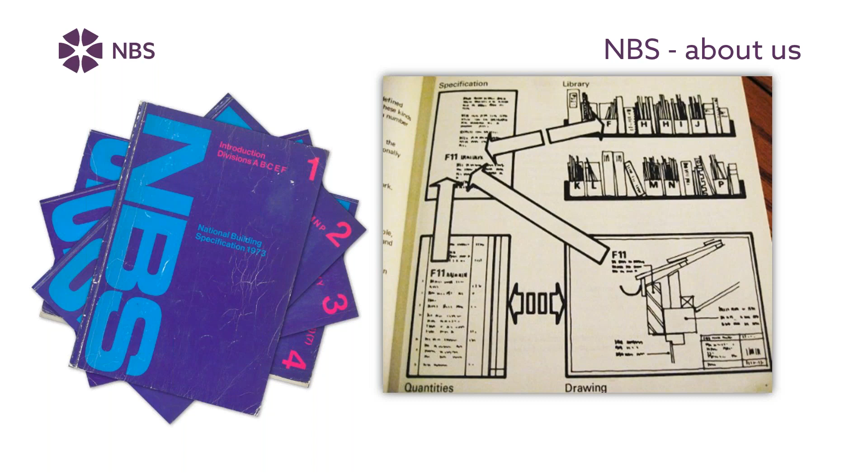But even in 1973, we had this image, which showed the specification being linked to a library of technical information in manufacturer's literature, to a bill of quantities, and to drawn information with strong annotations between the two. Now, obviously, that drawn information is much more likely to be a 3D representation and to link to CAD and geometry information. But it's still really important that those associations and connections to the specification are made, and that's what NBS tries to do.

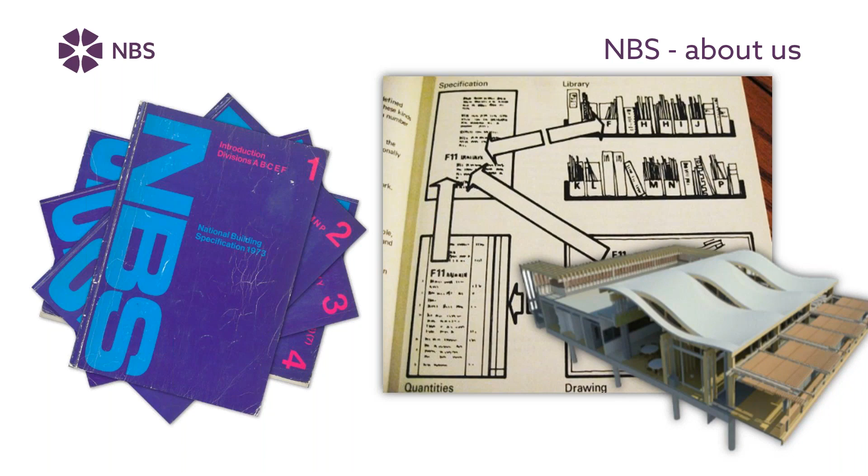We have two sets of customers. The majority of people who use our specification products are design professionals - architects, engineers, contractors and so on. We also have product manufacturers providing technical data and specifications for their products, and advisory trade bodies as well. The thing that NBS does differently is that we provide high quality data to match those two together, so that end users specifying are looking for high quality manufacturer information that's reliable, and those manufacturers need to know that the specifications they're getting are robust and full of the right performance information.

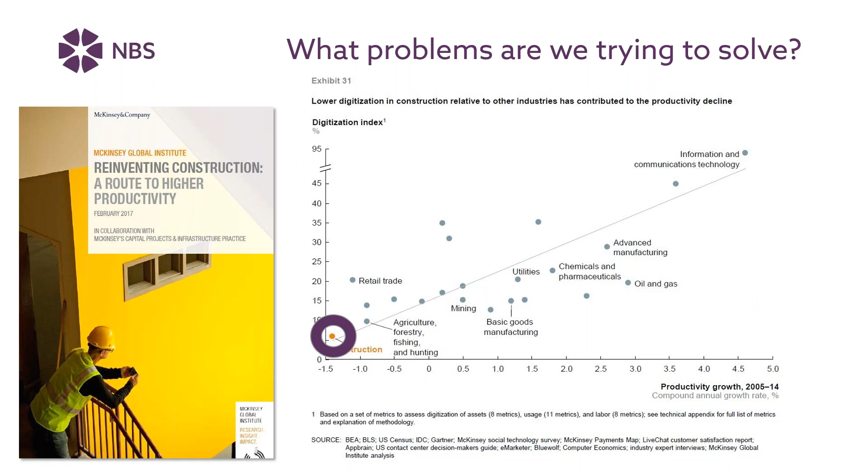So we still bolt things together the same way, there's still the same inefficiencies, the same problems that happen on site in a regular way. In terms of that McKinsey report, we can look at construction actually having really low digitization, and that has a direct impact on the productivity of the industry. So even though you might expect IT and media and other industries to digitize really quickly, we're even behind mining, agriculture and forestry in terms of the digitization of our industry. And that really sets us back in terms of what we can do to put productivity right.

NBS also produces reports. Most recently we've produced the Construction Technology Report 2019, and we produce an annual BIM report indicating the level of BIM adoption in the UK industry over the last year. We've got tons of case studies and research and reports about the technology stacks that people are using on projects, so do check those reports out. Here's an example from one of those, the NBS specification report, and this particular question is looking at specification difficulties - what are the challenges people encounter in terms of specification?

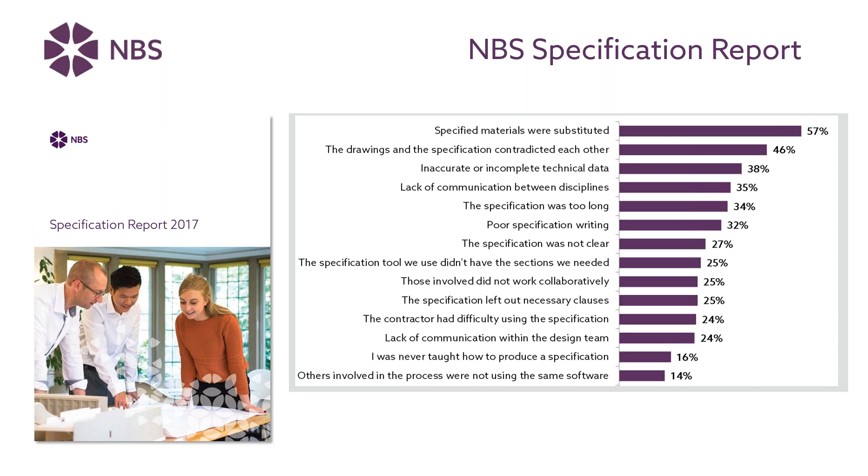The example that we see here is over 50% were saying that the specifications of materials that was made in the design process are substituted at some point in the process. Other things: lack of communication, poor specification writing, and then the last two at the bottom, not being taught how to produce a specification, and the others in the process not using compatible software.

And we see the same things come up time and again. A lack of quality in terms of specifications not being clear or concise, not being classified in a consistent way. A lack of time to spend on specification. So time tends to be spent on drawn information and on the model, and then the specification is left till a later point. And actually it requires the most experienced staff, and therefore the most expensive, to actually produce that specification information.

And also to define the responsibilities. How much data is required for a particular system and who's responsible for generating that? Is it the contractor, the manufacturer, the designer, and so on.

Not only that, but we found that over a third of the users who responded to our survey have seen a project go into dispute. And that's often when the specification is actually presented and probably read for the first time by many in the project team. So a third of the industry going into dispute in terms of projects that they're working on. When we know that disputes are increasing, often those are down to specification issues in terms of the way that project might go.

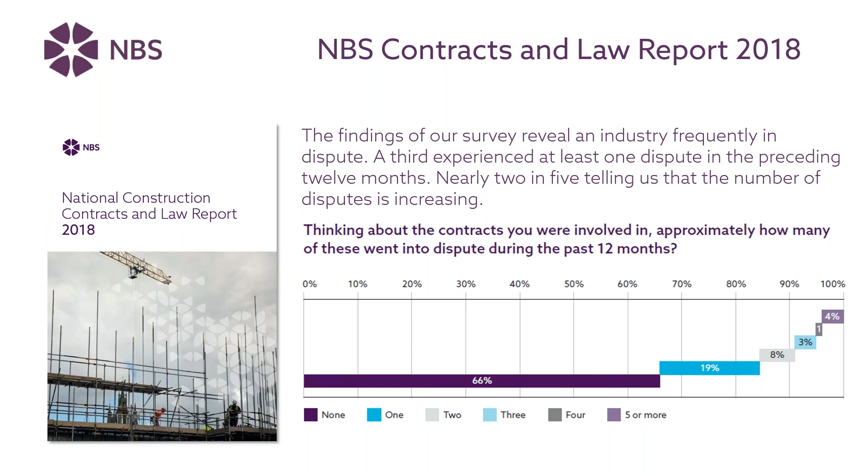In the UK, we've been fortunate in terms of digitization that there was a mandate pushed forward by government to encourage BIM implementation across our industry. This was in 2011, Francis Maude saying that if the UK industry could push the BIM agenda, we would actually become leading in that market. And that's been the case, and we've seen real productivity as a result of that.

At the time, they were just in the design and construction phases, but now this can apply to the entire BIM timeline and to the entire project timeline.

In the UK, this isn't just theoretical, the need to improve the construction industry. Many of you may have heard about the tragic fire in West London, at Grenfell, where 72 people lost their lives for a number of reasons, one of them being the use of combustible cladding along with flammable insulation. That's been a real impetus to review, especially fire strategy in the UK.

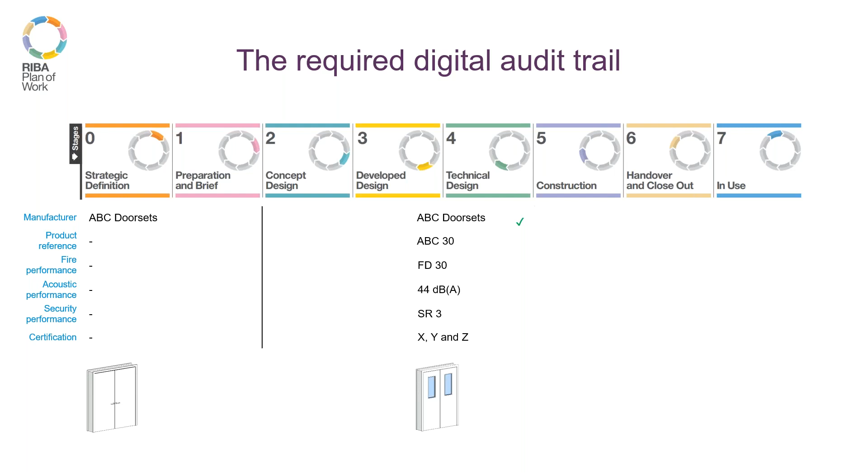In UK parlance, in stage 3 or stage 4, the technical design stages, you might have chosen the kind of product you're looking for from a particular manufacturer because it achieves a certain set of performance requirements fire performance, acoustic, security certifications, and so on.

But in the construction phase, that might be substituted by a contractor on site for a number of reasons. The important thing is checking that all of those performance requirements are still captured and met by the new product. Then at a later date, when the handover of that information happens to the asset manager, ensuring that data is captured to allow the product reference to be used in the asset management in the long term.

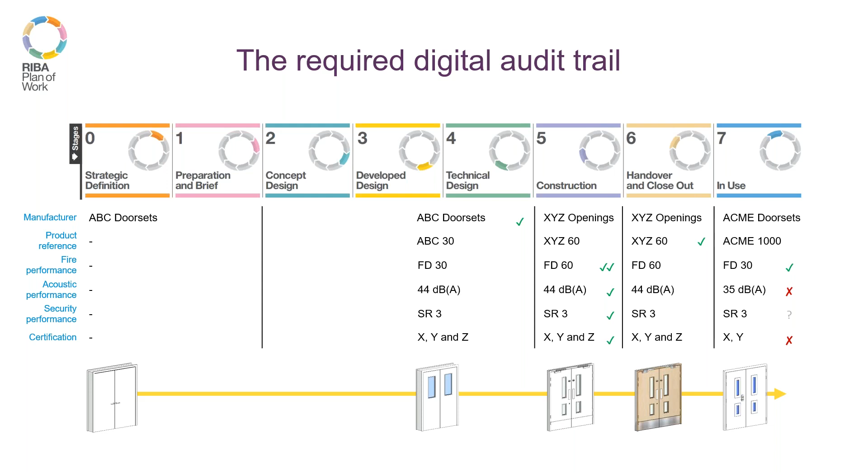So at a later date when that door needs replacing and we're into in-use phases, somebody says, oh well, we've got an Acme 1000, we can just use that. Well, no we can't, because the performance requirements are set out and are stringent in terms of what's required for that particular thing. That idea from design intent carrying right the way through to the operation of the building is being called the golden thread, ensuring that golden thread is carried through in all of the specification and product selection across the project.

So what's the plan and how do we go about digitizing construction? Well, 20 years ago, Bill Gates was quoted saying that the differentiation between those who win or lose in business - he was talking about large tech companies at the time - is how to do an outstanding job with information.

And how you gather and use that data is the difference between success and failure. In the same way, the World Economic Forum report indicates that there's a real need to understand that information management is a real value creator. It's not just about a new cost of technology. So there are three stages to this in terms of motivation - thinking of BIM and digital construction not just as a cost, but as a potential value creator for the business, and understanding the benefits.

Collaboration - if we're all using the same standards and open systems, we begin to communicate better and collaborate more effectively. And then the enablement, having the background, the clients, the contractors, and everybody working together to ensure that this isn't just about implementing technology, but about changing behaviors and processes right the way through the supply chain.

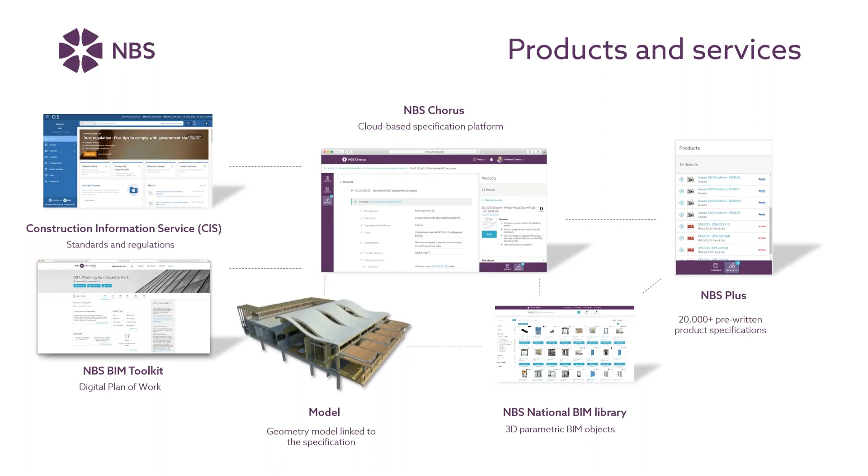So let's have a look at NBS Chorus in particular.

Here on screen you can see NBS Chorus, and there's a couple of things to say. The first is that it's entirely cloud-based, browser-based, so I'm using Chrome in this example, but you could use whichever browser you are most familiar with, even an iPad or a tablet, and NBS Chorus will respond to whichever device you're using. Also, you'll notice that you have a visual representation of the projects that you're working on screen, and they could be in any locations using the different content that we've got available.

But because they're project-based, you can invite people to just have access to the specifications that you want. So within one of those projects, I could have multiple specifications associated with it, and invite somebody to just the relevant part of the project. And they wouldn't have visibility of the other aspects of projects that I was working on that I hadn't invited somebody to have access to.

And here's a typical article within one of the sections of NBS Chorus, in the heavy timber framing section. You can see that it's a digital way of working. I can check out a particular article and begin working through it, and there are suggested values in lists that drop down to help me make choices. On the right-hand side, there's always technical guidance to assist with the choices you're making as you go through.

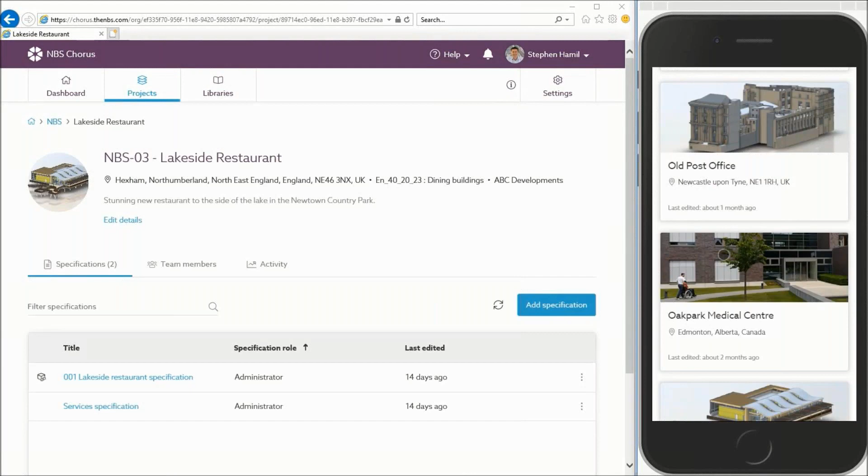But in those circumstances, here's an example of two people working together. On the left-hand side, somebody working in a browser view, and on the right-hand side, somebody working on a mobile device, a tablet, or whatever it might be, using the UK content in this example. As I work through on the left-hand side, I can check out a clause, and then on the right-hand side, that user would see it as locked out, and they wouldn't be able to work on that.

But by editing their own content, that's then locked out to the person working in the browser view, so you have visibility of the changes being made in real time, because they're being pushed to the cloud and saved. In terms of having access to those, you can collaborate with people and have multiple people working in the same section at the same time.

This is about building a connected, collaborative ecosystem that's much wider than just the specification itself.

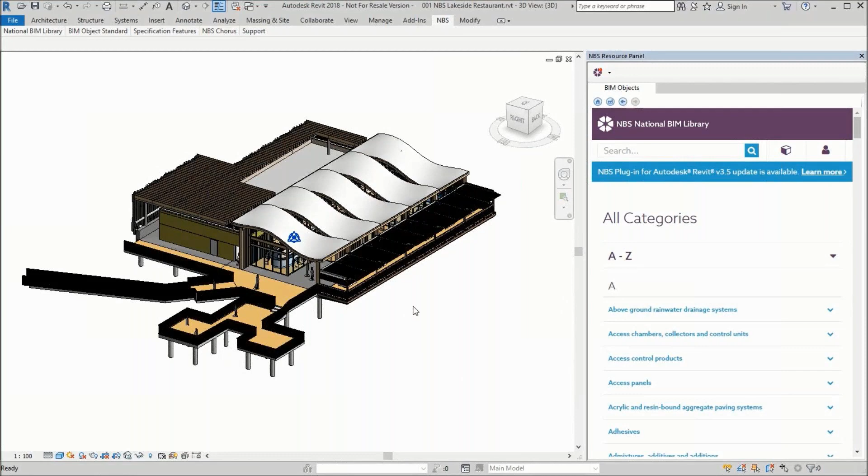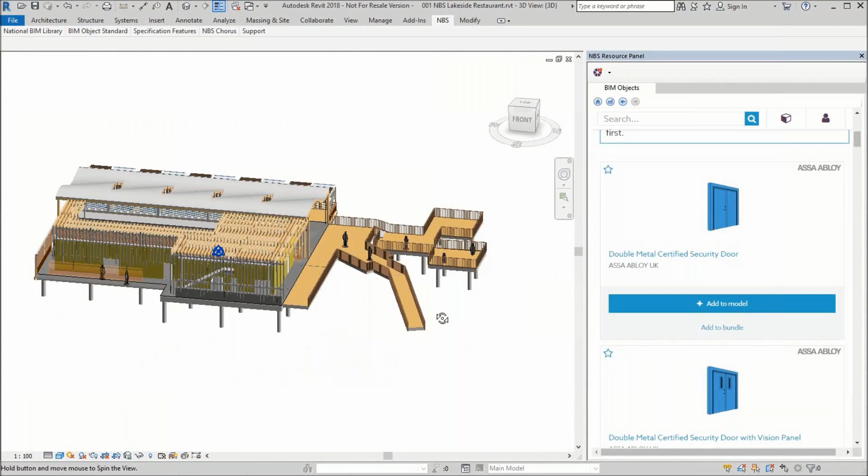We can start that journey by looking at the National BIM Library, our BIM content. In this case we're looking for a particular security door, and we can search for that on the National BIM Library and drag it directly into the Revit interface. When you drag that into the model, that object comes not only with its 3D representation, but with all of the parameters and properties. So when I select that in the Revit view, you can see on the right-hand side all of the various properties and parameters that you would expect, produced in a standard way, in accordance with recommended standards.

We're also integrating more closely with common data environments, things like BIM 360, Newforma, and Viewpoint, integrating NBS with those common data environments.

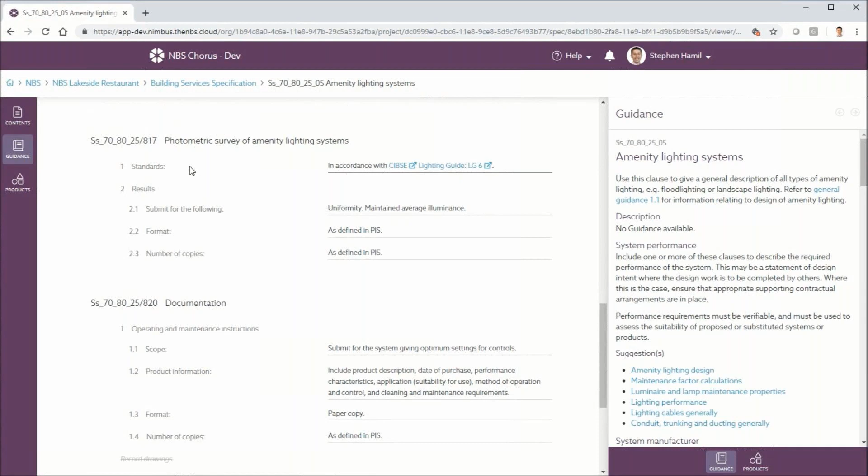In this example, we've got some clauses which will contain information like testing or inspection that might contain the term submit proposals or submittals required. What NBS Chorus can now do is find all of the instances of those terms like submit and export them as a submittals schedule, to import it into common data environments like Newforma and BIM 360. That's in a format understood by those CDEs, and in each of these particular CDEs on screen you can see a submittals report being generated, but still using those NBS Uniclass 2015 codes to organize that content, rather than the manual task of someone going through the spec to find everywhere it says submit or submit proposals.

What's really exciting to me is our integration with our CAD and modeling platforms as well. We're working with multiple partners, Autodesk, Graphisoft, Vectorworks, and so on, to ensure that we can integrate NBS Chorus really closely with that design software.

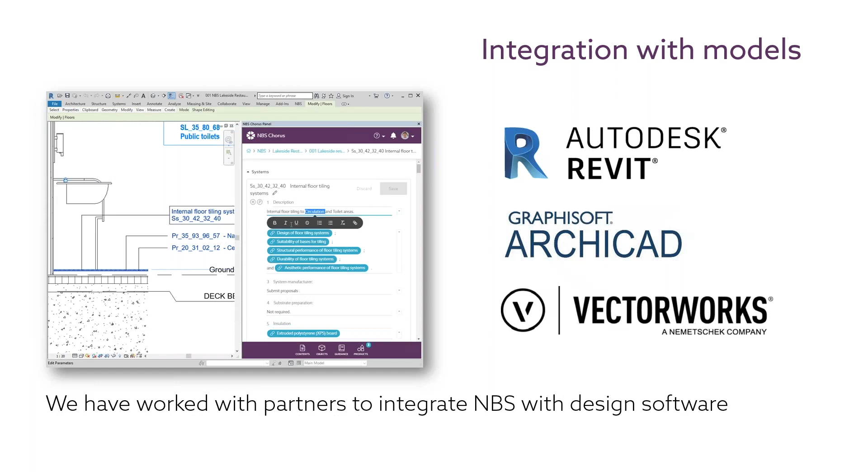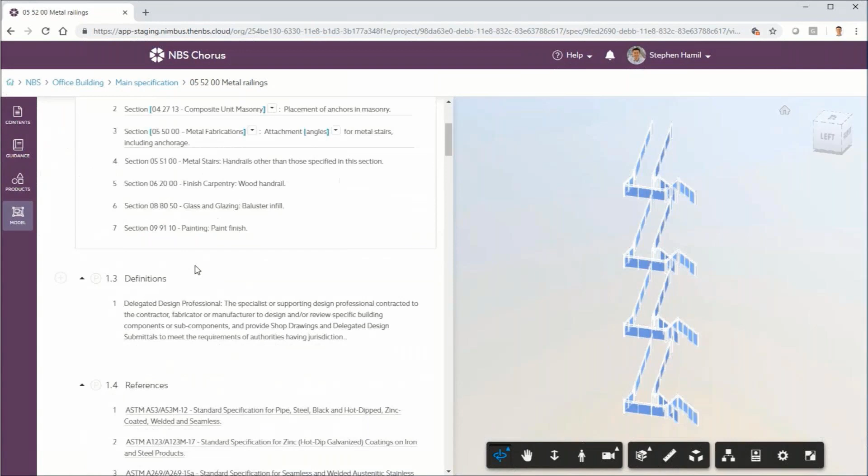The first aspect of that, here's an example of a Canadian project, courtesy of Next Architecture, a 120,000 square foot office. I should admit this is currently in concept - an example of what we're hoping to develop using the Autodesk Forge platform, showing the ability to navigate the specification information using an example of the model.

At the point in time the model is uploaded, you can begin to navigate through the specification by clicking on various areas of the model and see the clause content on the left-hand side and the sections and articles, but also begin to work through them live with the context of the model on the right-hand side. That's currently in development using the Autodesk Forge platform.

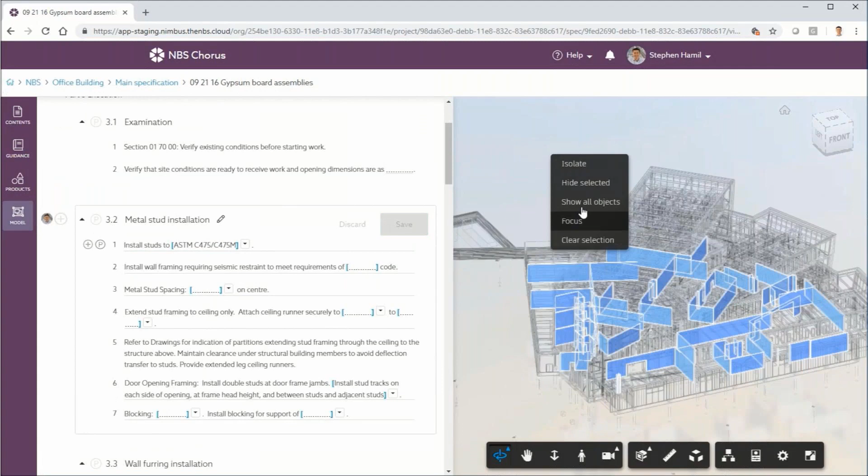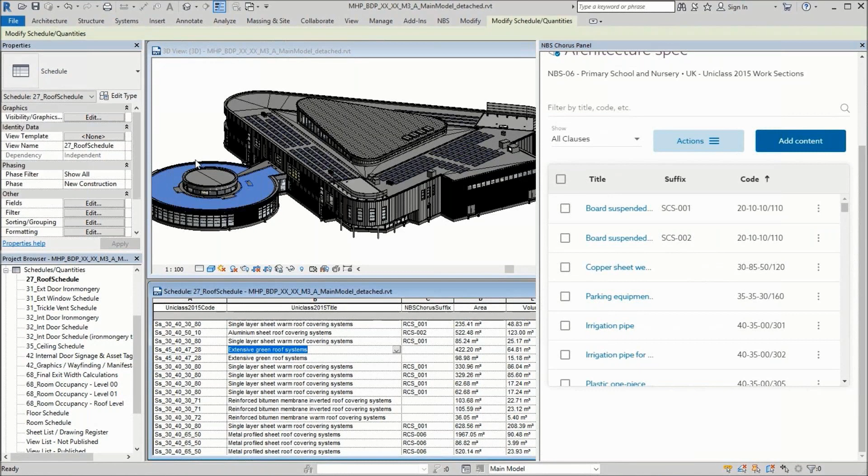What is live currently is the ability to integrate directly with the Revit interface - our most advanced integration is currently in Autodesk Revit. As a benefit of what Revit can do now, we can run NBS Chorus live in a browser panel within Revit. You can see the model at the top, a schedule at the base, and Chorus running exactly as it would in a browser on the right-hand side.

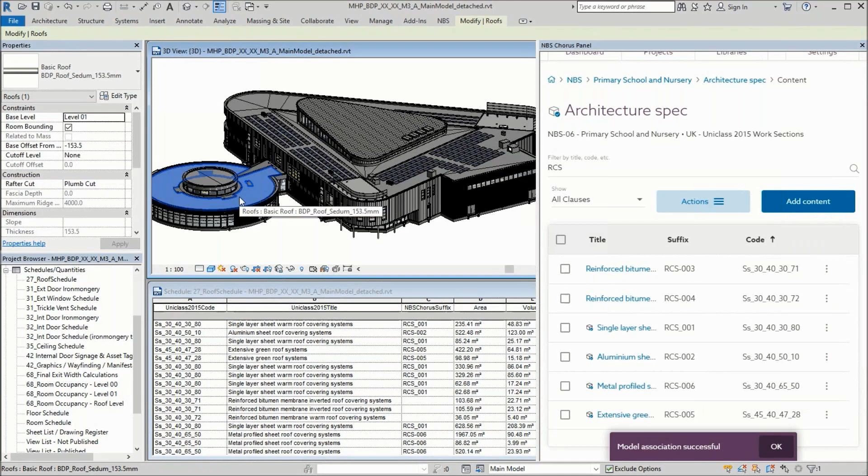What we can do is begin associating the model information with the spec, so that as we develop and move through the specification, we can take all of, in this example, the roof covering systems, and begin associating each one with model information and spec information to make sure that association is really close. That means annotations on any sections or plans of this drawing will always have the right reference, kept in sync by NBS Chorus and our plugin in how we manage errors and warnings.

But it also means that for those users who are more familiar with Revit and with a modeling interface, they can have access to the specification and understand the impact of the decisions that they're making. If they have the relevant permissions, they can even edit the specification. So as we begin to see more and more users working in a modeling type way in a digital platform like Revit, being able to have access to the specification and keep those associations, you can see now on the right-hand side and in the schedule that they're now all coordinated between model and spec.

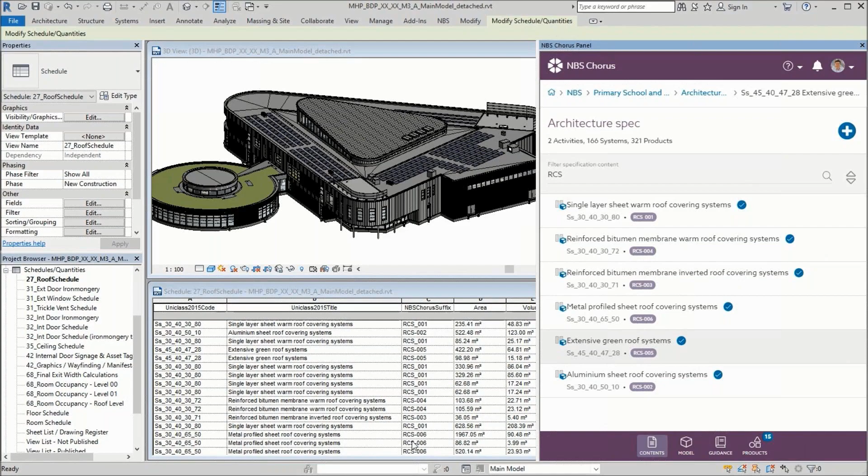Finally, as if you didn't need more reasons to trust what NBS do, we've had some recognition of late that's been really valuable to us. We've won some awards in terms of the UK construction industry, and there's an article indicating whether NBS is becoming the Google of BIM in terms of the types of developments that we do.

But also that World Economic Forum report that I showed you demonstrated that NBS was a good example of, in this case, the BIM library that I showed you of a data marketplace. The key thing there being that we only provide information that recognizes international standards, so we've really made sure that all of the content we deliver is of a really high quality. And then in Australia, a strategic forum for the Australian industry indicated that NBS was the leader not just in the UK but globally in terms of information management and our technology development. We've seen great adoption of Uniclass 2015 and NBS products and services in Australia, which has been really encouraging. So we're really encouraged by that.

You're probably familiar with the Henry Ford phrase about faster horses. In this context, we think that what the construction industry sometimes does is try to make incremental changes. That's really similar to Henry Ford saying that you're only ever going to get a percentage increase out of your horse, and it's never going to go past a certain speed. What people really needed was something much more dramatic and a step change. We understand in the same way that NBS Chorus is a sea change for the industry, and it is going to impact very differently.